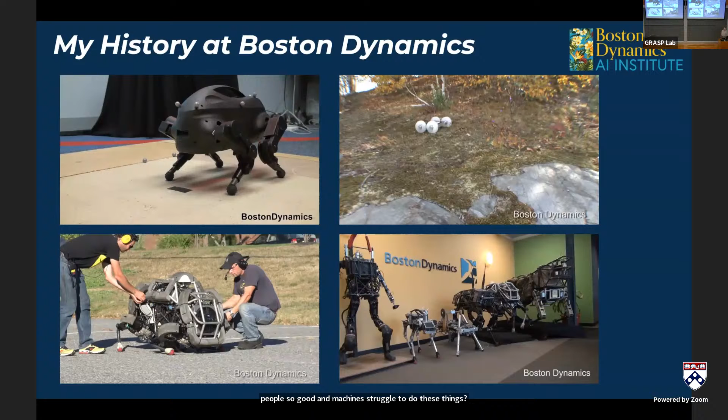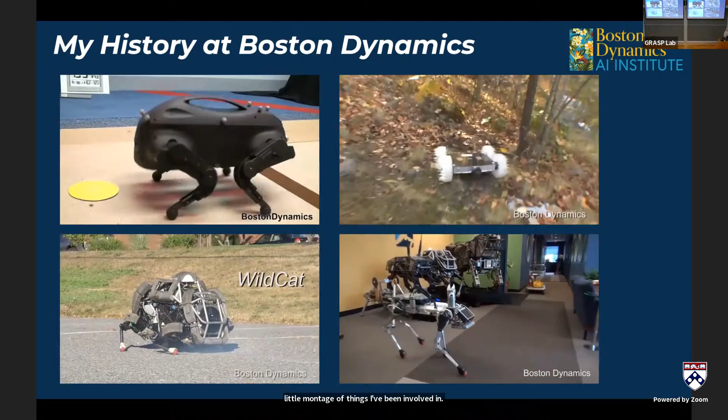Okay, so 2006, I moved to Boston Dynamics. This is a little montage of things I've been involved in when I was there. The thing on the top left is the very first project I worked on there, which was a robot called Little Dog. There was a Penn group that participated in this, the program that robot was built for and used it.

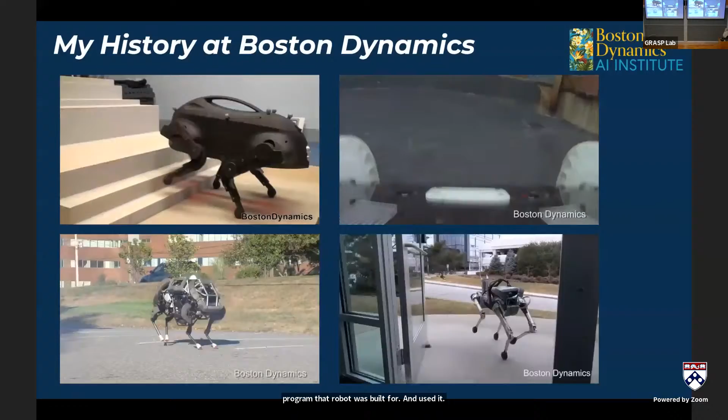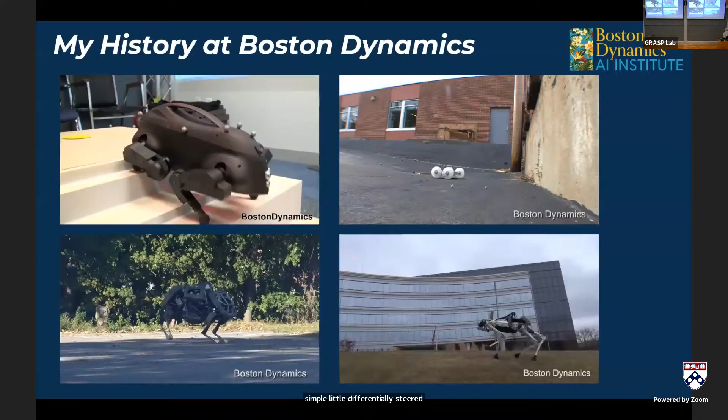The top right is a machine we used to call Sandflea. And the thing that was interesting about that was it was a very simple little differentially steered wheeled vehicle, but it had one trick up its sleeve, it had a leg in it, and it could use that leg to jump.

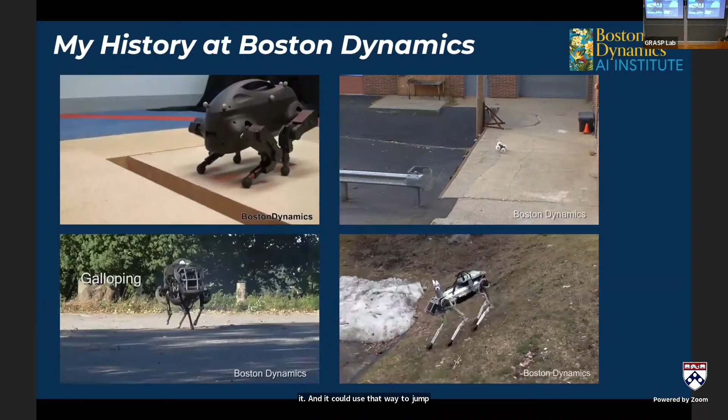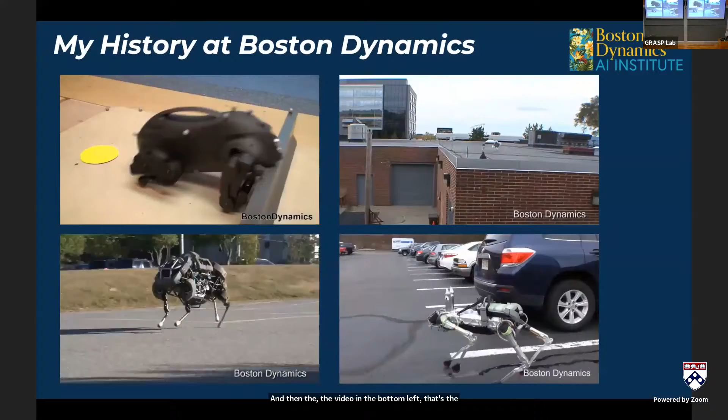And then the video in the bottom left, that's the cheetah robot. This is the outdoor version of it that Dan alluded to. That's a machine that ran at about 20 miles an hour, across a moderately flat parking lot.

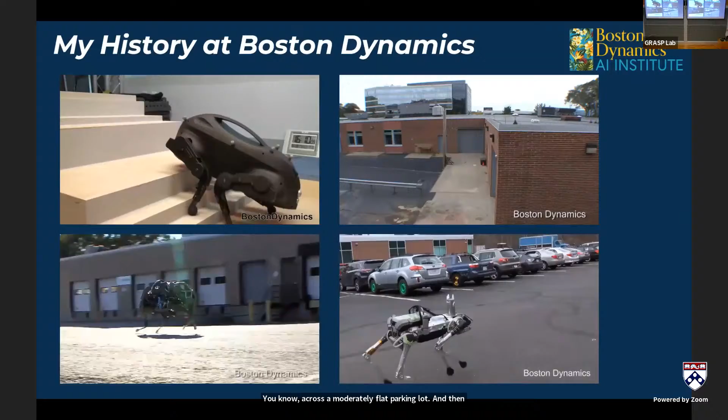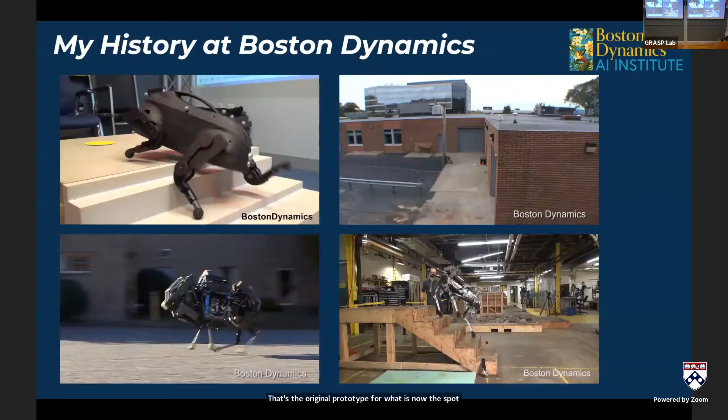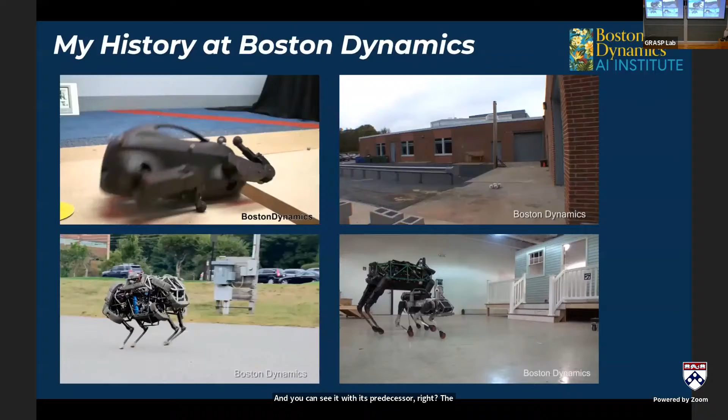And then the video at the very bottom right, that's the original prototype for what is now the Spot robot. That video is probably about 8 years old right now. You can see it with its predecessor, which was structurally different in that it used hydraulic actuators, whereas the smaller version is an all-electric machine.

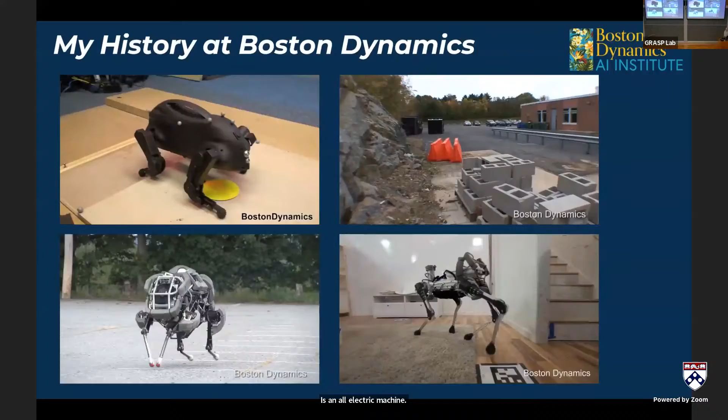Much more similar to what's in the world today is the product from Boston Dynamics. So what's in common here? These are all well-engineered mechanical systems.

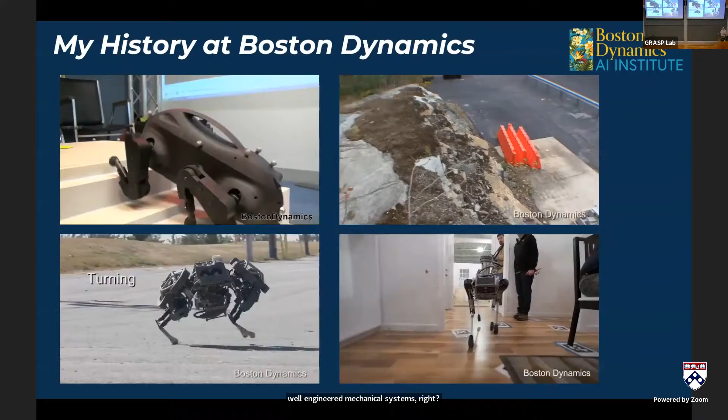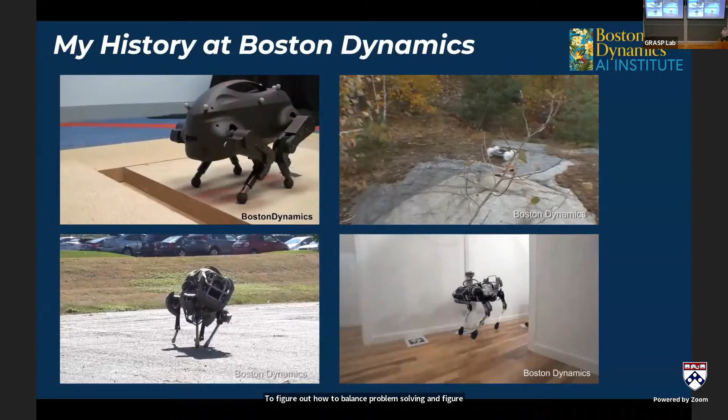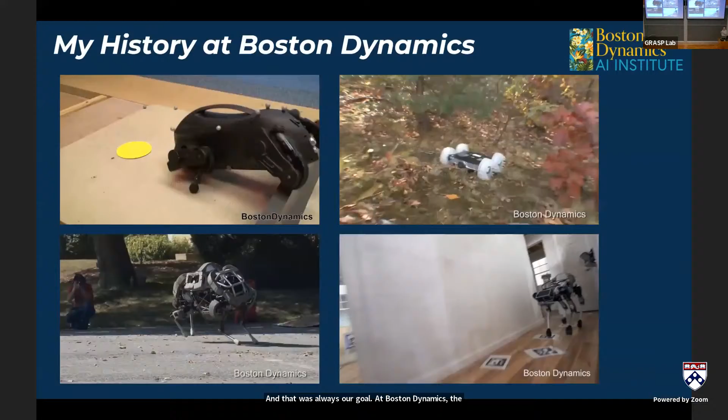There was a group of smart mechanical engineers who worked closely with a group of software engineers and control systems engineers to figure out how to balance problem solving and build these integrated systems that could actually do something demonstratable in the world. That was always our goal. At Boston Dynamics, the goal was, let's build systems, let's do research, but let's make sure that research culminates in a demonstration we can show to people.

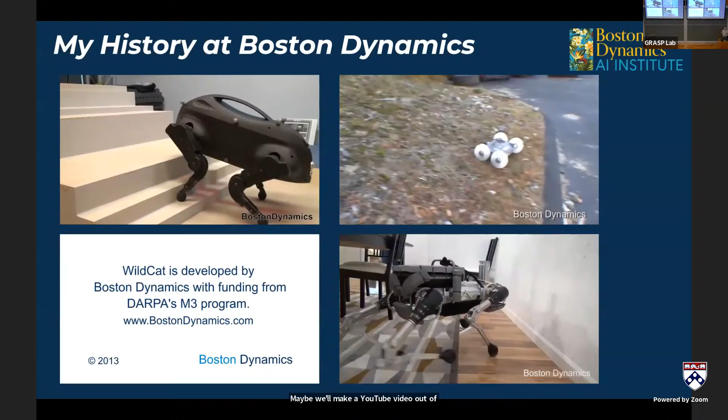Maybe we'll make a YouTube video out of it. Some of those YouTube videos will garner 100 million views, which is weird.

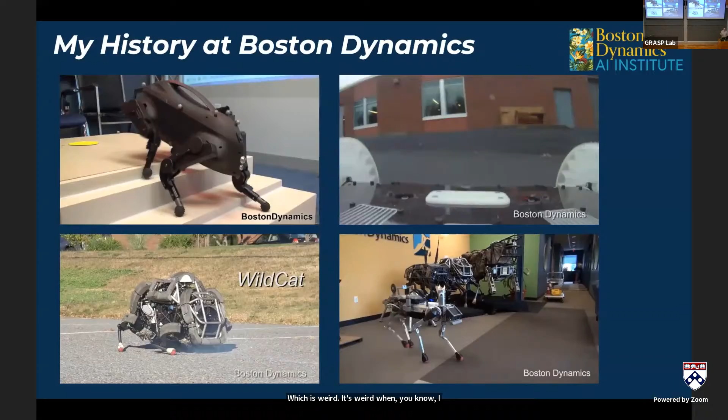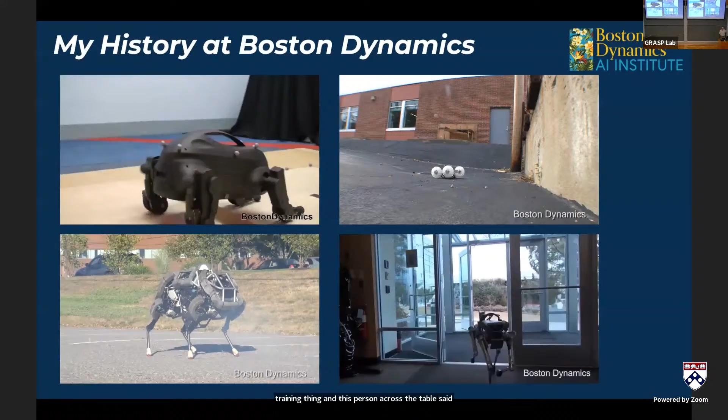It's weird when I go home and I talk to my wife, who at the time was involved in dog training, and she says, oh yeah, I sat with my friends at this dog training thing, and this person across the table said, have you seen this video of this robot dog thing? And she's like, oh yeah, I've seen that. I know who does that.

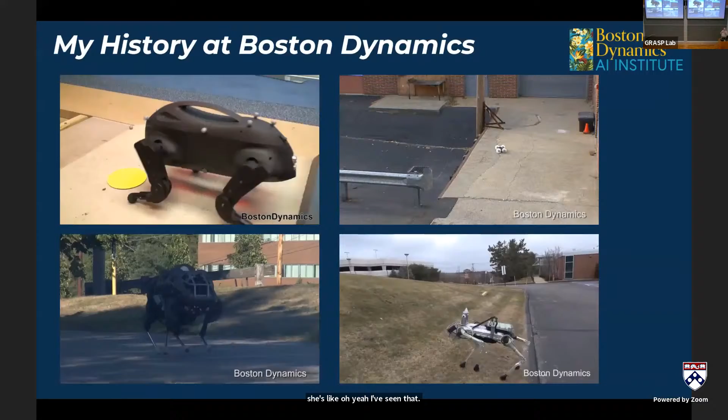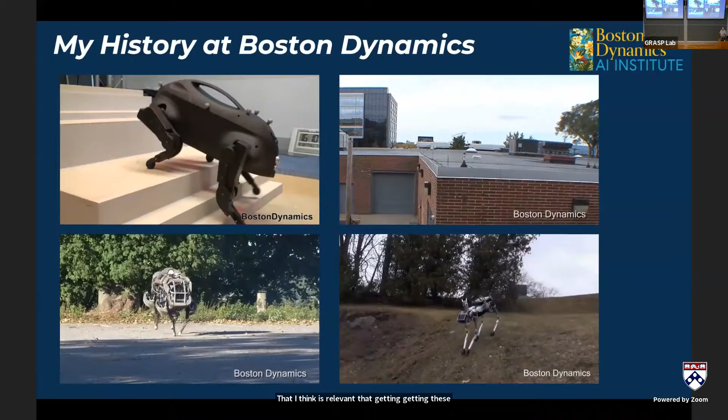But there's a measure of success and impact there that I think is relevant, that getting these demonstrations to a point where they actually can reach out to and touch society at large is an important accomplishment, because it's a way to educate people about what these machines are capable of.

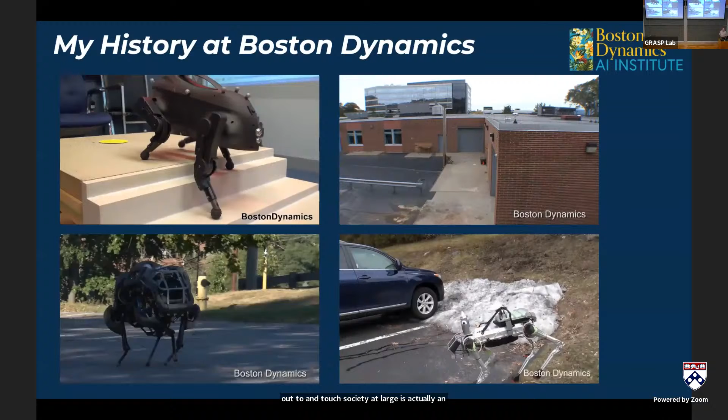So just a little bit about where Boston Dynamics is now. This is the other guys. They have an office in Waltham, Massachusetts. We're the guys with the office in Cambridge.

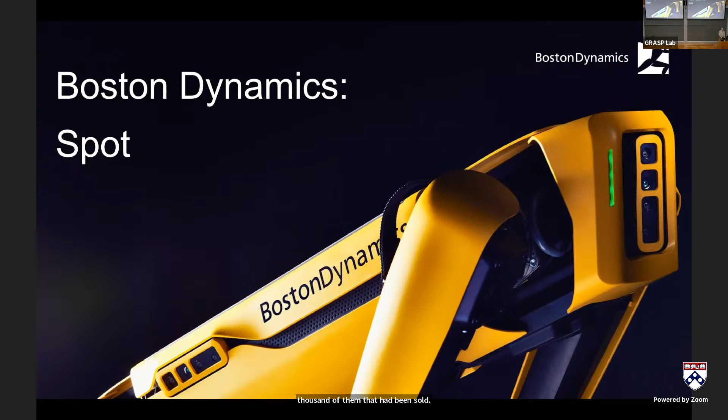So they are productizing Spot. They are selling Spot. When I left a year ago, I think there were about 1,000 of them that had been sold. I think at this point they're up to 1,500 or so that are out in the world.

What is Spot? Spot's a platform. Spot delivers mobility that you can use as a researcher or customer to then put your technologies on top of it. So it's really a mobility service for hardware and software payloads that people might put on those machines, including an arm, high performance cameras, navigation platforms, and computational platforms.

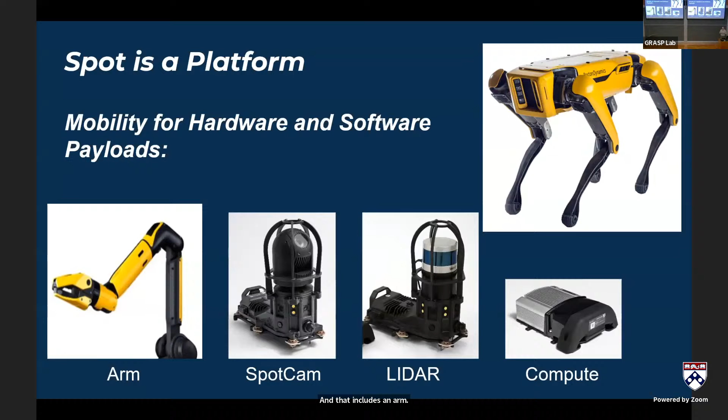The last year at Boston Dynamics, I spent a lot of time working with a small team on basically the manipulation functionality. So how do we deliver a mobile robot with a relatively high performance arm on it in a way that's actually usable by customers?

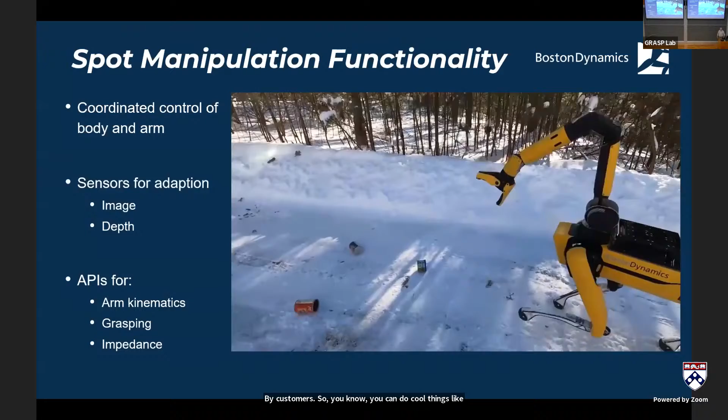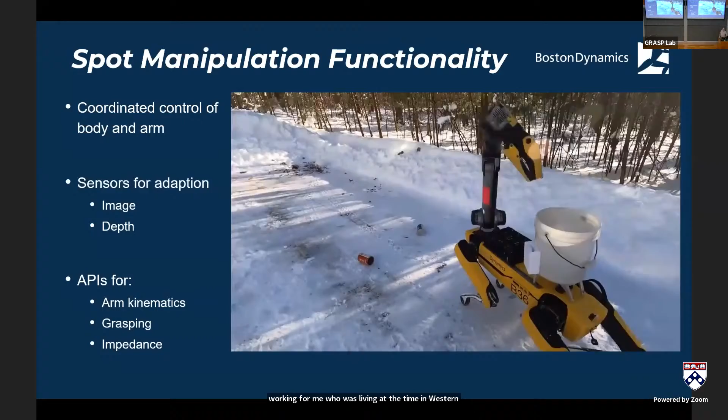So you can do cool things like jump rope. You can send the robot out to pick up trash. This is pandemic times. This is one of the guys who was working for me who was living at the time in Western Massachusetts. Cool thing is we can give him a robot to take home, and he can program the robot to go pick up the trash he conveniently left in the driveway.

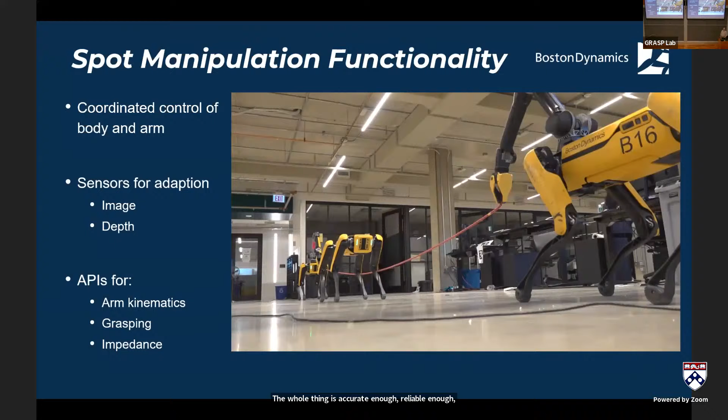The arm is functional enough that the robot can actually drag a full-size cinder block around in a parking lot. The whole thing is accurate enough, reliable enough, repeatable enough that you can do parking lot scale art with the robot.

So what are we doing at the AI Institute? Well, we're trying to combine that type of athletic capability, the mechanical capability of the machines, with a new capability focused on what I'm going to call cognitive intelligence, the ability of these machines to effectively reason about the world they're operating in, understand it, and do things that are actually useful for us.

Spot's a cool robot. Over the last year, since I'm detached from Boston Dynamics, I get slightly more honest assessments from customers who have those robots. I think everybody has said, oh yeah, this thing is great, it's very reliable, it works. It falls down, it gets back up, it keeps working, it does what I expect it to do.

And then they complain that Boston Dynamics didn't open certain interfaces to the thing. And I go, yep, sorry, I don't work there anymore.

But the missing part is it's not capable by itself in the environment. Some smart person still needs to program the robot, right? Some robot expert needs to be involved in helping the thing navigate, building software tools to make the thing navigate.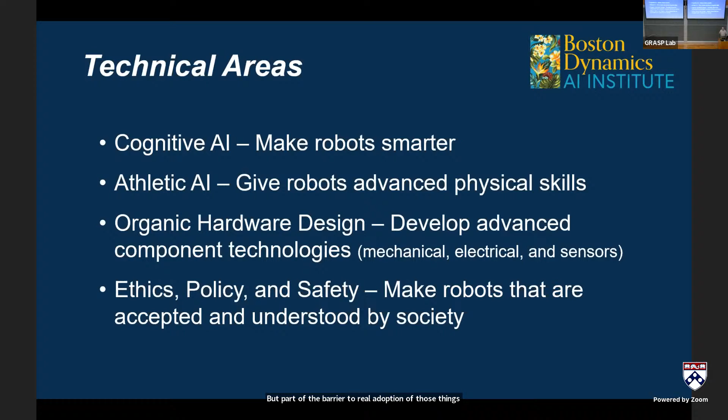But part of the barrier to real adoption of those things is the complexity of programming them. And so one of our focuses at the AI Institute is to try to address that. So how are we doing that? Well, we're focusing on 4 gross areas.

The first is cognitive artificial intelligence. How do we make robots and embodied AI systems smarter? How do we actually give them some notion of common sense?

Athletic artificial intelligence: how do we make machines more capable physically? A lot of the performance you see in those old Boston Dynamics videos comes from a really smart balance between what was programmed into the machines and what was actually built into the mechanism of the machine. There's lots of tricks using passive elements, spring elements, and things like that to make the machines very, very capable. We're very interested in what we refer to as organic hardware design - using advanced design techniques as well as materials techniques combined with computational methods to do better mechanical, electrical, and sensor and perception design.

And then last, and still very, very important, is worrying about issues related to ethics, policy, and safety. Because it's not enough for us to build these technologies and make cool videos. We actually have to make sure people understand what they're seeing in those videos and that they understand how to use the kinds of technologies we're producing in an appropriate way, so that they actually help society at large, because that's really what we all want to do. We want to make life better.

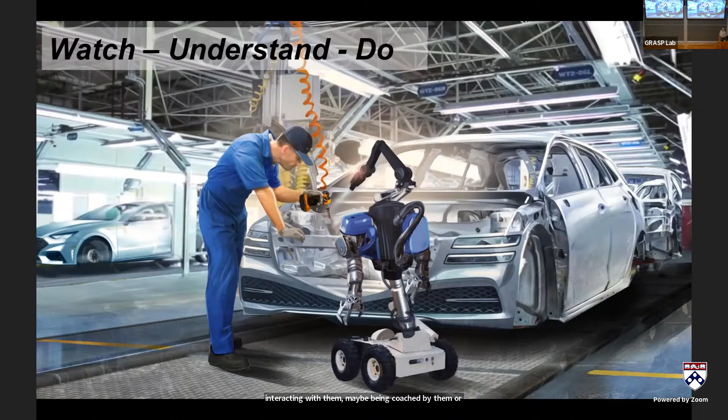So what does watch, understand, do mean? This is a bit of concept art that explains the idea: a person doing a task in a factory, a robot watching them, interacting with them, maybe being coached by them or listening to them describe what they're doing, much as an apprentice would do with a master craftsperson. After the robot's done that for long enough, it should be able to go do the task.

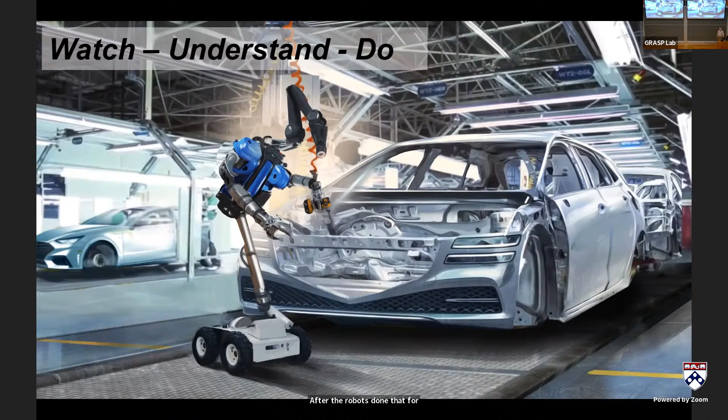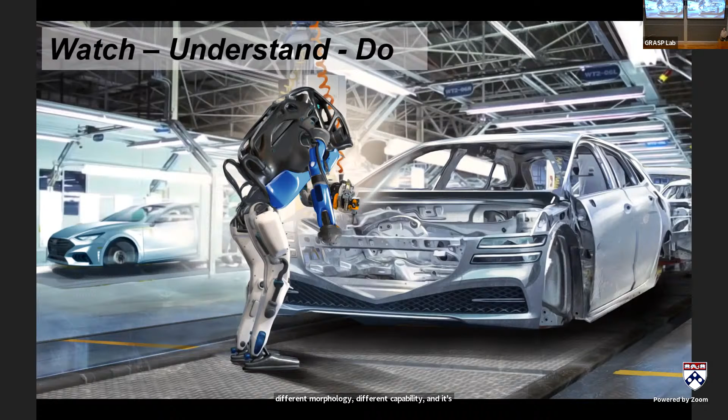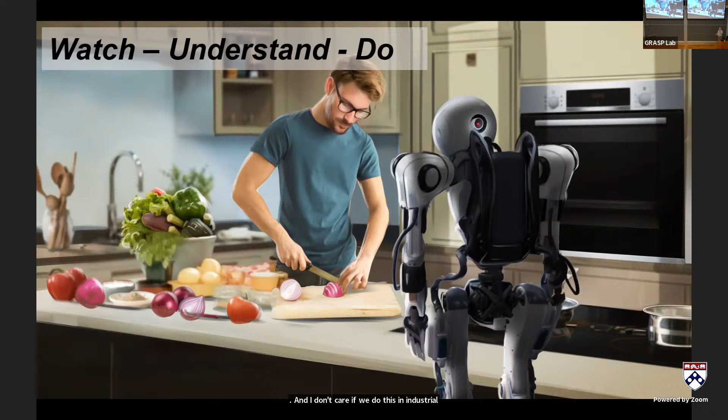So let's replace the person with the robot. Ideally, once I've gotten one robot to do this, I should be able to transition that capability to a robot with different morphology, different capability, and its understanding of the task should be generic enough that the new machine is capable of performing it. And I don't care if we do this in an industrial setting — we should be able to do the same thing in a home setting. I should be able to teach my robot how to cook dinner, and the robot should be able to turn around and cook dinner for me.

So how are we going to do this? Well, one of the first places we're going to start is by basically using language models as an initial entry into this space. And what are we trying to do?

The very simple tasks we're going to focus on initially are basically focused on bicycle repair. We said, what's a simple mechanical thing we can get the robots to interact with? And we said, bicycles are pretty nice — they're complicated enough, but also simple enough. They're easy to move around in a lab, don't take up a huge amount of space, and we don't have to worry about going to a car factory to do it. So the simplest type of task is, let's fix the bike seat.

Let's remove the bike seat. You can feed that into any of the modern large language models, with the right sort of preconditioning and prompt engineering, and get them to pop out things that look like commands you'd like to give to your robot — things like 'grasp the bike seat.' It's easy enough using modern vision technology to ask a vision system: where is the bike seat? Has the robot grasped the bike seat?

And then, what are you going to do? One model for this is to essentially precondition those language models with the programming interface we have to the robot — basically give it a list of skills and capabilities that the language model can use when it generates its outputs. Sounds like a great idea. Okay, let's see what we can do.

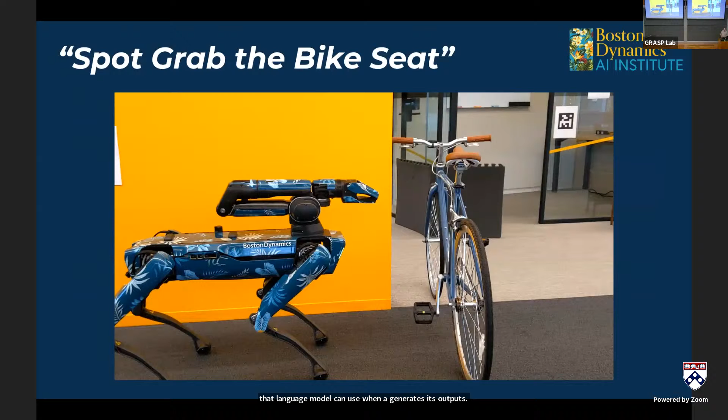Here's a short video of a Spot robot with a really nice vinyl wrap on it, not that silly yellow. And look, it's grasping a bike seat. How did we do that? Any guesses — was it what I just showed you in the previous slide? None of the interns are allowed to answer.

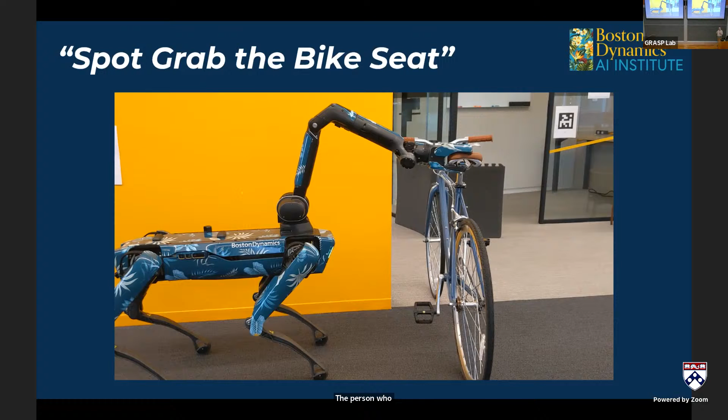No, this was teleop — so the robot can do it. That's important, right? Why did we teleop it? We wanted to convince ourselves yes, the robot is capable of doing this. The person who teleoped it hid around the corner and didn't look directly at it — they only looked at the information the robot had available. So we did it as a moderately fair test.

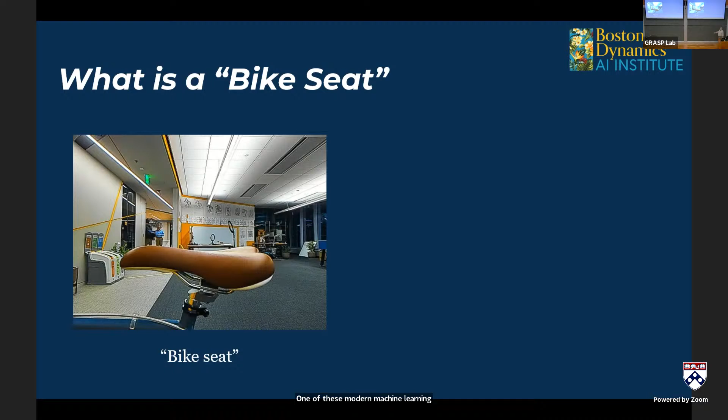What happens when you ask one of these modern machine learning trained systems to find the bike seat? We'll give it that picture and say, find the bike seat.

First thing that comes out is all the red stuff. Why is that? Because those are all good places to sit. The particular model we use thinks floors are good places to sit, and it associates the word seat with places to sit, so it says the floor. That must be the bike seat, because it doesn't really know what bikes are. It just happened that it didn't have a lot of data about that.

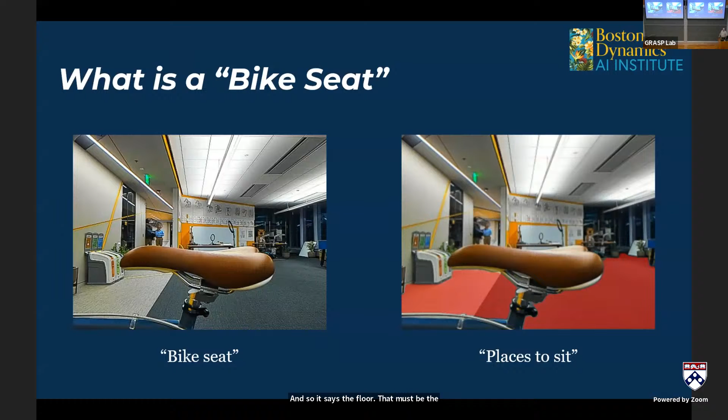So using these large language models or large vision models, or any of these generically trained systems, you need to be sure you're providing good context for them, that they're being focused on the salient elements in the environment, right? So the first example was: where's the bike seat? Well, if you just use this visual language model, you get the seats, which happens to be the floor.

If you tweak it a little bit, you can get it to actually pick out the bike seat post. I don't quite know why it does that, but you can also get it to pick out the bike seat, right? So it is in there that it knows the right thing, it's just the way the particular Bayesian weights came out, it happens to prefer picking the floor on the first try. So if we can add more constraints, sizes, locations, basically preconditions that we know ought to be true about a bike seat, then we can rule out the seat post, we can rule out the floor, and we can actually pick the bike seat as the thing we want to interact with.

So it's possible, with some extra guardrails on the system, to get those language vision models to actually pick out the right objects and then be able to work with them effectively.

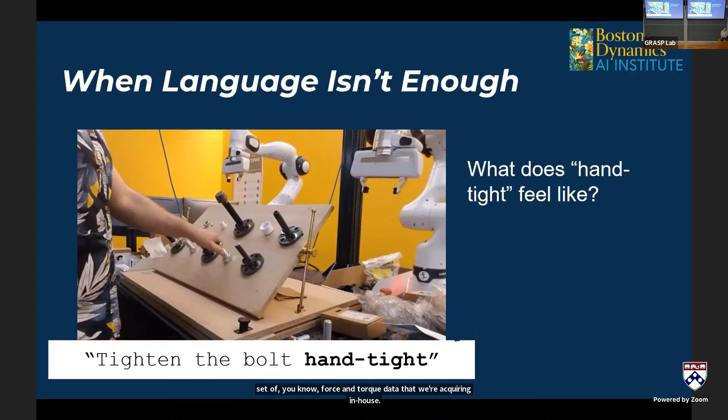That immediately leads us to the next project we're doing, this dexterous mobile manipulation problem. It's really, how do we build machines that can reach out, touch, interact with the world? How do we tighten bolts to hand tight? What do I want to do? I want to tidy the living room, repair a piece of equipment, do cooking tasks, repair equipment in your home, do automotive assembly operations, wash your car, right? These are all things that require a level of dexterity and force interaction well beyond what we're capable of doing currently.

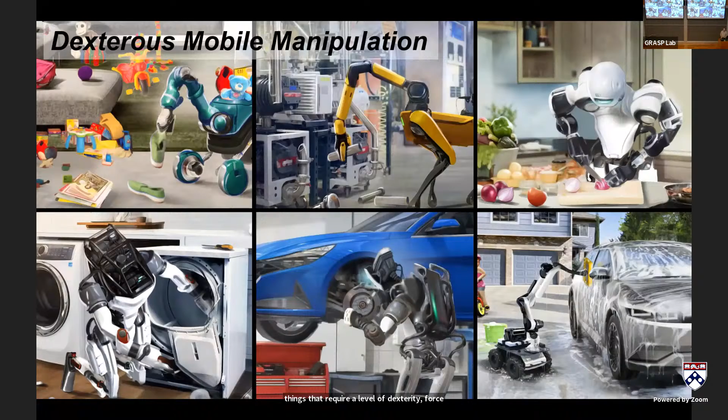So what are the challenges in this space, right? We really need to do contact-rich dexterous manipulation. We need to do more than just carefully pick things up and place them. We need to build machines capable of using their hands, arms, and bodies to interact with their environments. These machines need a capable level of task planning that reasons not just about geometry, but about the forces, masses, and dynamics of the environment they're interacting with. And we need to make these systems smart enough to solve all the navigation and search problems that happen around doing any of this interaction.

If anybody has ever worked on a piece of equipment or a car, how often do you fumble through your toolbox to get to the thing that's under the other stuff, or that you put down and have since put something on top of, right? These are all things we take for granted.

Whenever we build industrial robotic systems, we engineer the bejesus out of them so that those problems don't happen. If we want the robots to really work next to us in our world, we have to get over that. We have to make them capable of dealing with some of the chaos that we put into the world.

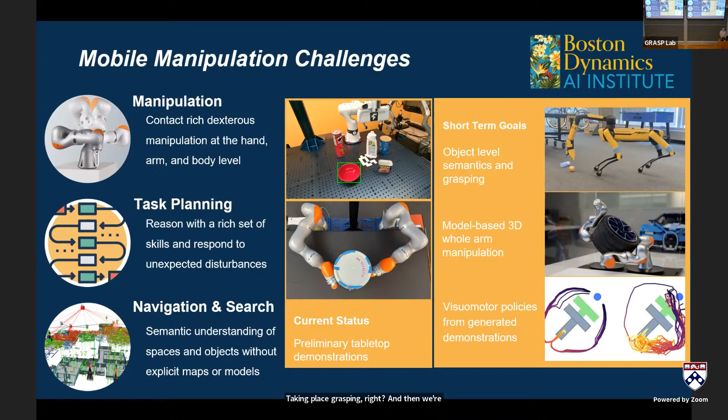So we're doing some basic tasks on traditional pick and place grasping, right? And then we're doing things that start to look like whole body manipulation, and starting to couple that with efforts to do it while we're being mobile.

One of the first things we're working on is trying to connect a more informed visual language model up to a semantic grasping system, so that when you tell the robot, go grab the bike seat, it does the right thing. And it understands how to solve the geometric and force problems associated with properly grasping the bike seat, with an understanding of what you're going to do to it.

If you're trying to pull the bike seat out of the post, you're going to grab it in a different way than if you're trying to align it correctly to the bicycle.

A key part of this is what we'll call arm level dexterity. You could also call this finger level dexterity if you want to talk about doing in-hand manipulation. Really, it's about these sort of contact-rich manipulation problems where contact is going to occur in a variety of ways across the entire extent of a mechanism. So it's not just about the fingertips touching the object.

Thank you very much. Yeah, I'll leave that there.

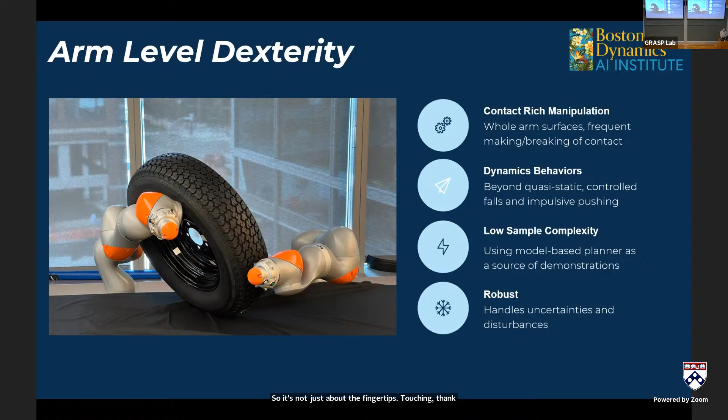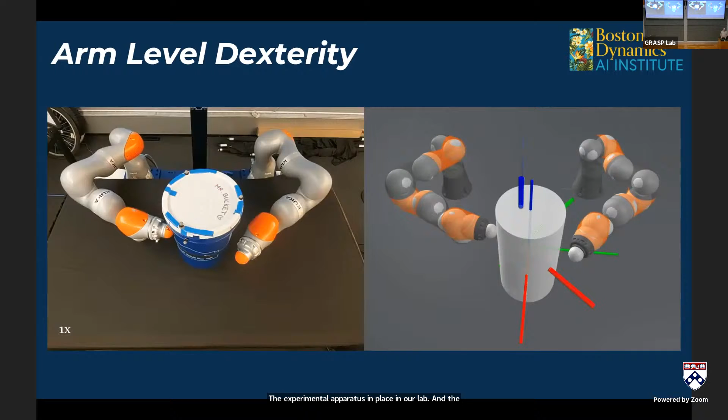Here's just a short little video of relatively basic arm scale manipulation, right? Twist the bucket - that's our friend, Mr. Bucket. Nothing wildly fancy compared to the current state of the art, but again, we're excited to have the experimental apparatus in place in our lab and the instrumentation around this to collect all the pertinent data efficiently and effectively.

Okay, last project area that we're working on is this thing that we're calling the ultra mobility vehicle. So I showed you the video at the beginning with human parkour. The thing we're interested in here is slightly different. We're interested in what we're going to call this hybrid locomotion scheme.

There's a sport called trials bike riding - go look it up on YouTube. There are truly amazing videos of people riding slightly specialized bikes over extremely difficult terrain. How do they do that? They do that by riding their bike occasionally as a normal bicycle with two wheels on the ground, but most frequently they ride it as a unicycle with either only the rear wheel or the front wheel on the ground.

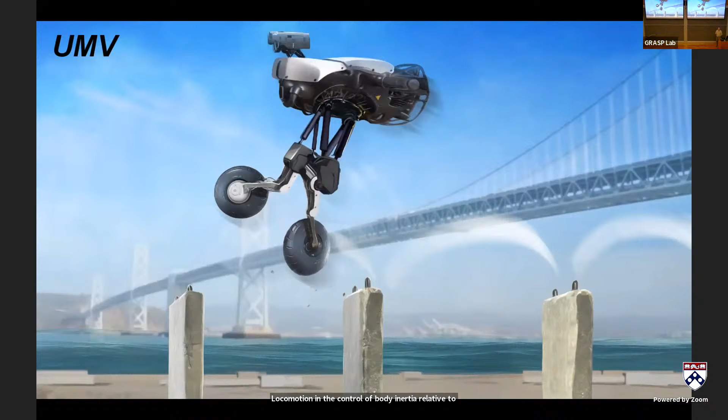What are we trying to do? Again, artist conception - we're going to build essentially a bicycle robot with all of its mass distal from the wheels. And that machine is going to do its best to hop, jump, balance across really complicated terrain. We have a prototype of that.

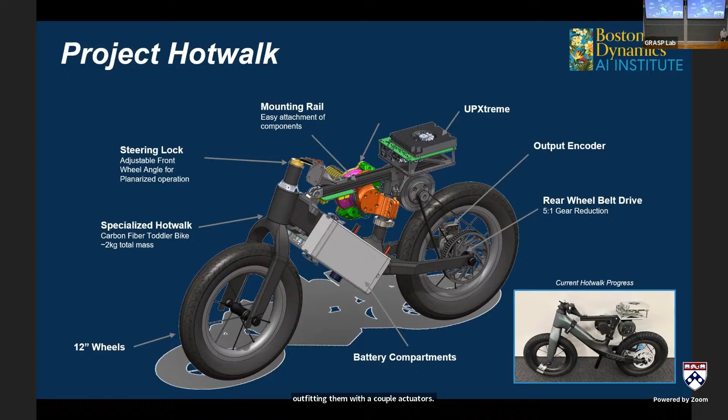Where are we right now with that? Well, here's our first prototype. It's doing jumps.

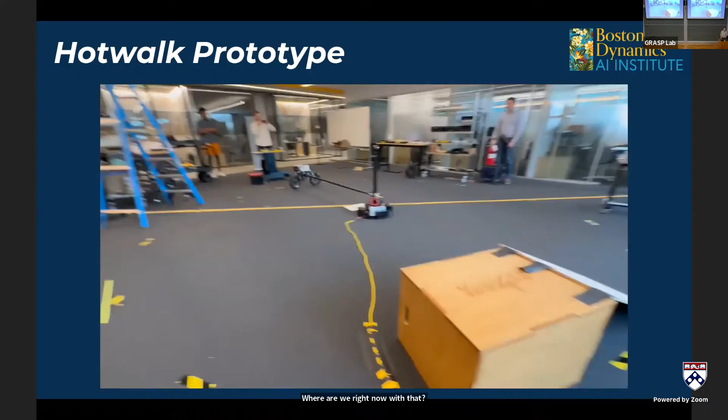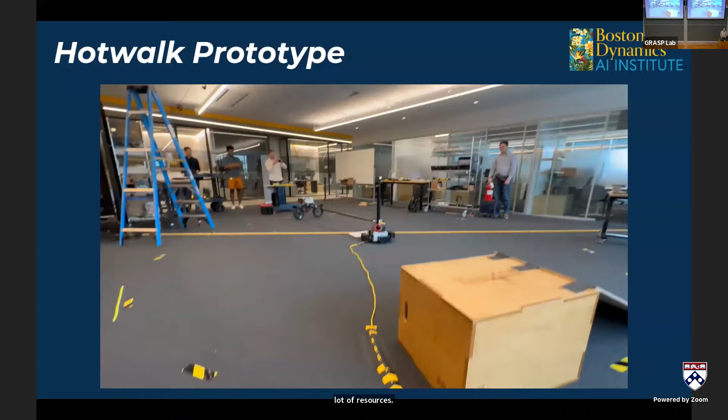This is not particularly well controlled at this point. It's just a little bit of torture testing we did the first week to convince ourselves it wasn't going to fall apart when it started to jump. But hey, you can do that. Not a lot of resources required, relatively straightforward. We think that's a key first step towards making progress on this effort.

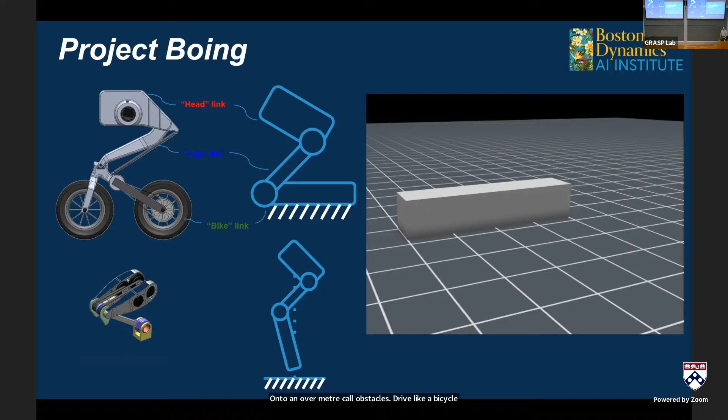The next thing we're really focused on is the jumping part of the problem. This is what we refer to internally as Project Boing, and we have a simple prototype in process. The goal is to get to the thing on the top left. The bottom left is the first thing we built, a very simple jumping mechanism. Here's a relatively accurate physics simulation of what we think that looks like in operation. With realistic actuator designs, we think it's reasonable to build a little over 0.5 meter tall machine that can jump onto and over meter tall obstacles, drive like a bicycle, balance, and really be a start towards that type of trials bike riding.

Where would I like to be? I'd like to be building machines that could really help people. In this case, we're thinking about people who have mobility disabilities or disadvantages, and how we could build a machine that gives them the confidence and capability to go into complicated terrain with their capable dog, keep up with their dog, and be able to navigate in those types of spaces. So we think this project is a key enabling technology to get to that point.

And, you know, go there, be an intern, and then become a faculty member at a university. And then quit the faculty job and make YouTube videos.